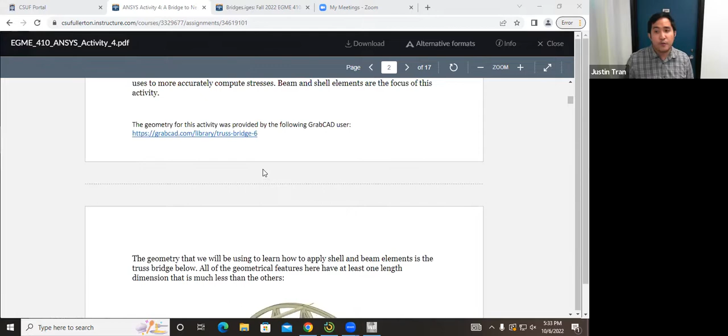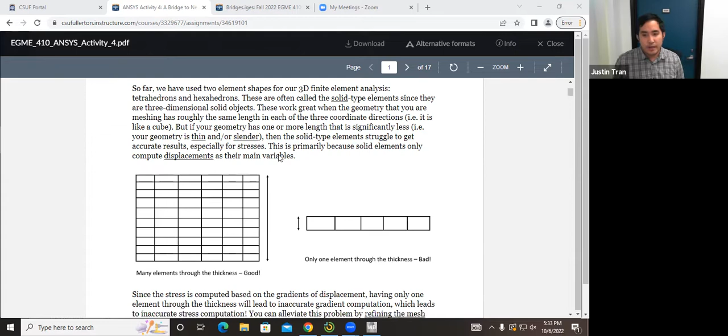So what we're going to do today is start with this geometry. I'm going to show you how to decompose it, take it apart, and replace it with shells and beams. Then the majority of the time we'll spend cleaning up the geometry, making sure it's good in its shell and beam form, and then we'll put it into an FEA simulation.

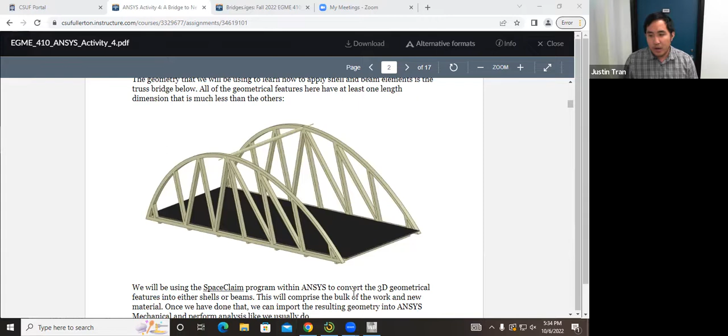Let's go ahead and open up Workbench. Just like we've done before, let's start a static structural analysis — click on static structural and bring it over here.

We're going to import the geometry. Right click on geometry, go to import, and import the bridge geometry that I have on Canvas. If you go to the Canvas site, go to the activity page, there's a CAD file called bridges.iges — that's the one we're going to work with. Go ahead and double click that to load in the geometry.

From there, we're going to edit this geometry in SpaceClaim. This is the first time we've used SpaceClaim — up to this point we've only used Design Modeler in ANSYS, but SpaceClaim actually makes it a lot easier to do shells and beams. So that's what we're going to do.

If you double click on geometry, the default should be SpaceClaim, but if you want to be sure, you can right click it and then click on Edit Geometry in SpaceClaim. It's going to take maybe a minute or two to start.

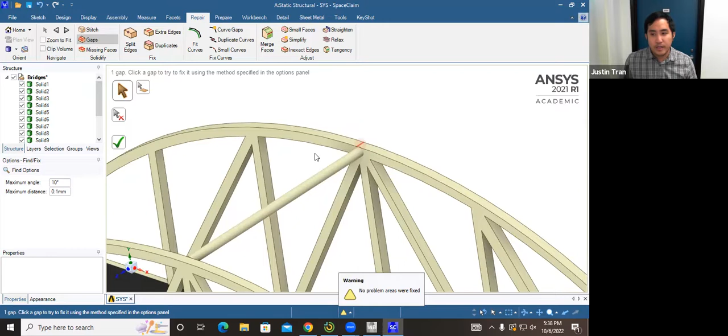And then we're going to do the same thing with gaps. Okay. If you click on gaps, you can see that there's one area here. That right there counts as a gap that SpaceClaim is saying is going to cause an issue. Normally if you click on this, it will fix those areas, but that thing right there is actually something a little bit special that we'll deal with later.

So it's not actually going to fix it, but I did want to show you what it would look like if it did find an issue. For now, don't worry about it. SpaceClaim's not going to actually fix that. I just wanted to show you where you would find it and what it would look like. Okay. Now that we've done a very basic stitching and repair on the solid, we're now ready to start modifying it for our simulation.

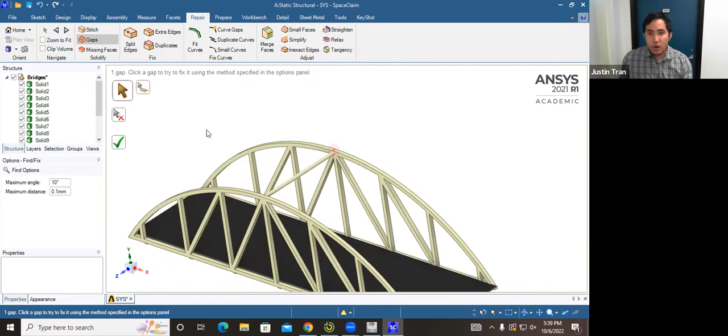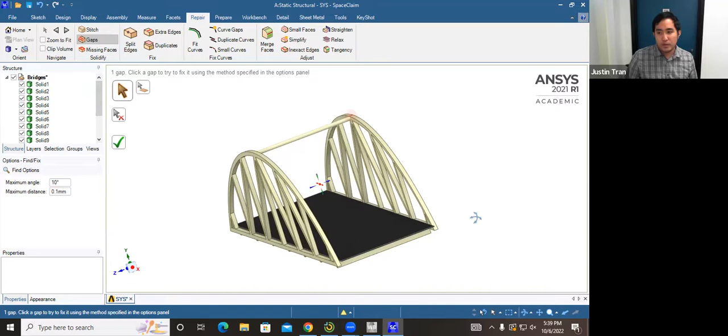Okay. The first thing we're going to do is look at all of the thin surfaces and turn them into shells. Remember, a shell is basically a 2D representation of a 3D surface that's very thin. We actually have three bodies in this assembly that can be suitable for shells. We have the road, and you can see the road itself is very, very thin. If you zoom in on it, you can see it does have some thickness right now. It is actually a rectangular slab, but it's so thin that it's going to be much more suited as a shell.

And actually the sides of the bridge as well. The sides of the bridge are also very thin, because if you look at this dimension, you can see that it's much thinner than the other two dimensions. Okay? So to make a shell element, you're going to click on Prepare. Prepare is on the top ribbon to the right of Repair. And then you're going to click on this operation here called Mid Surface.

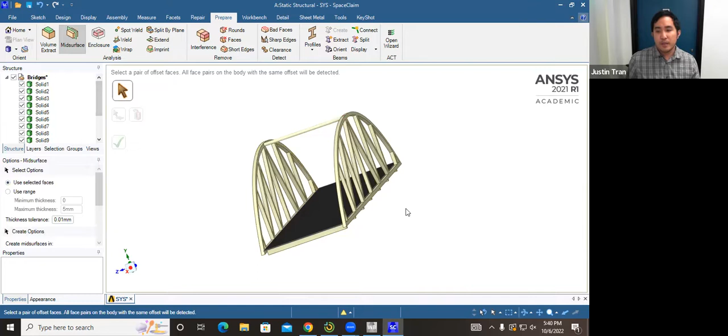If you remember when we talked on Tuesday, a mid surface basically takes two parallel surfaces, eliminates them, and puts a shell right in between. So you're going to click on mid surface, and then click on two parallel surfaces here. Let's start with the road, because that's the simplest one to do.

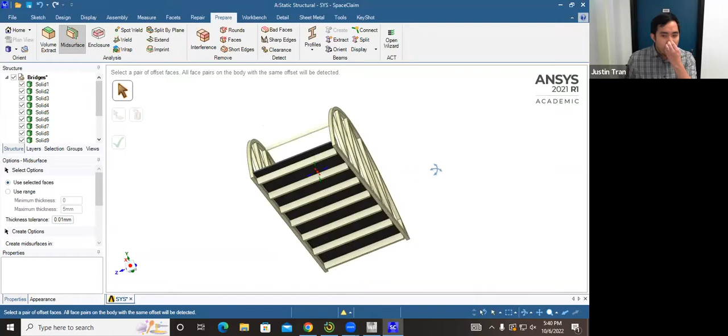Making sure that mid surface is highlighted here, you're going to click the top of the road. That's going to highlight one surface, and then you're going to rotate around. You can use the middle click button to rotate the geometry. And then you're going to click on the bottom surface of the road. Okay.

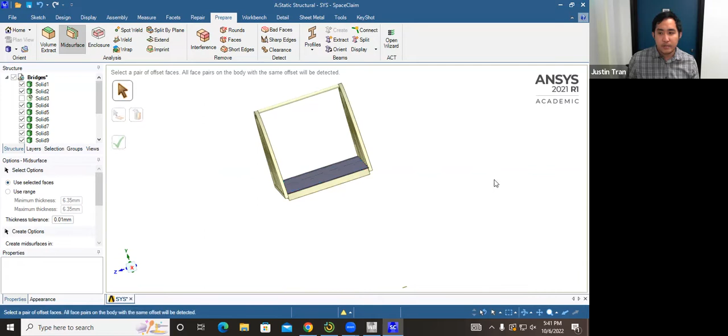And if you did everything correctly, the first surface you click should highlight blue, and the second surface should highlight green. And so to complete the mid surface operation, you're going to click on this green check mark here for complete. Okay. And so after you do that, and you kind of move around a little bit, you click, you'll see that the road has been replaced by a very, very thin sheet. And they even made it translucent for you to kind of see that it's very thin. Okay.

If it's not translucent, then don't worry. This might be a 2021 thing, but as long as you can see that it's very thin, then you were successful. Okay. I think mine does translucent by default, but they might have changed that in a later version.

Yeah. I mean, they update the software every year. It's like buying a new version of a textbook every year. They just kind of move a couple words around, and then they make you pay $120 for it.

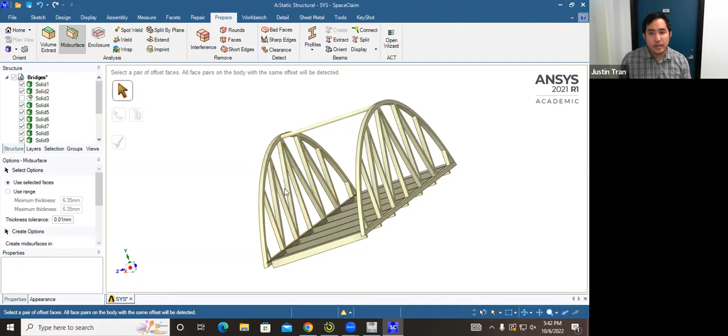All right, was everyone able to create a mid surface for the road? Okay. If it's translucent, that's great. If it's not, then don't worry about it. Okay, and so we're going to repeat the same thing. Mid-surface should still be highlighted, and you're going to do it for the sides of the bridge. So you're going to click on, let's say the inner surface for the bridge, and then you're going to click on the outer surface.

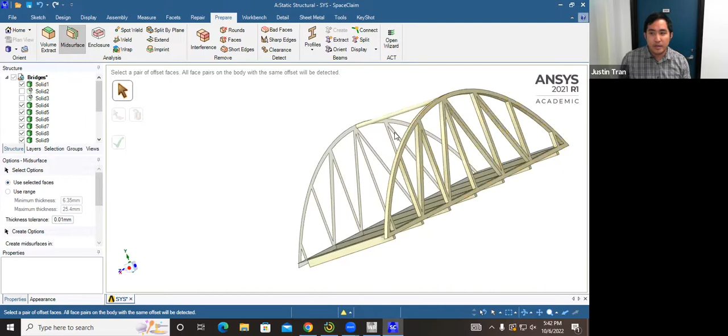Okay, and so you'll see the same thing. It's going to highlight green and blue. You're going to click on the check mark, and then you click elsewhere, and then it's going to replace it with the shell. And then we're going to do the same thing on the other side. It doesn't matter which one you click first, as long as you click both parallel surfaces. And then once you click both parallel surfaces, you're going to click on the green check mark again to finalize it.

Okay. And so once you're done, you should see the road and both the left and the right side of the bridge replaced with shells. So they should be very, very thin at this point. Okay, was everyone able to mid-surface? Yeah. So you're going to go to prepare and then mid-surface right here. Yeah. So it's like a sandwich. Exactly.

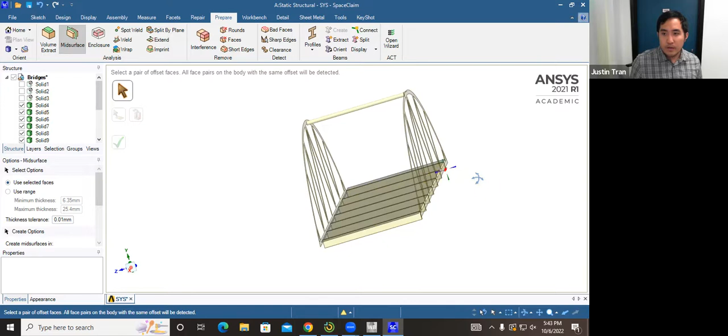Okay. Yeah, so you want to make 3 shells: a shell of the road and a shell of the left and right sides of the bridge. All right, was everyone able to do that? Anyone still need a bit more time? Okay. So I'm going to move a little bit quickly just because there's a lot to go through, but then I'll come back around at different points.

Okay, so the next thing we're going to do is extract out the beams. All the other solids remaining here are slender, so we want to transform them into beams. So you're going to go still in the prepare tab, and then click on this entry right here called extract. If you read the tooltip for this, you can see that it extracts a beam from a solid, and the solid must have a constant cross section. But this part's really easy.

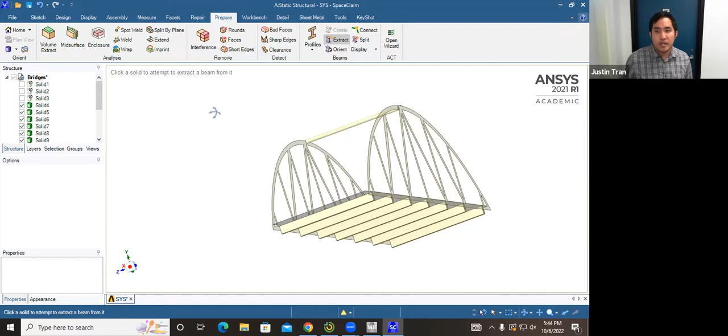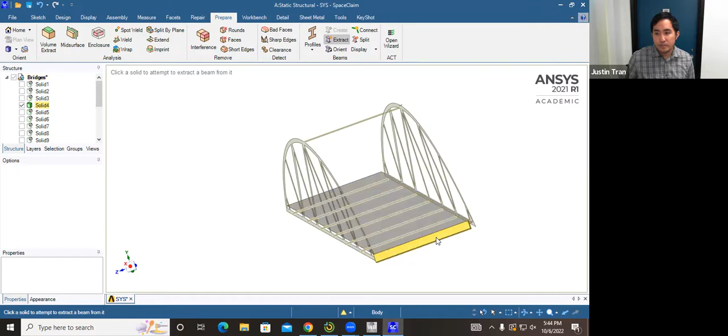So all you have to do is make sure that extract is highlighted, and mouse over to a beam part. It should highlight, and after you highlight it, just click on it. Once you click on it, it's going to replace it with a line, and that line is going to be your beam element. And you're going to do that for all of the beams on the bottom as well. And so in the end, we were actually able to transform every part of this geometry into shells and beams, which is going to be great. Okay.

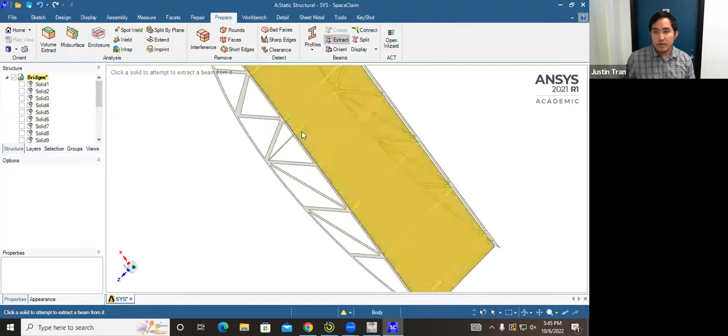Because it's translucent, it's hard to rotate. Yeah, okay, that's fine. All right, and so after you extract all the beams and you've mid-surfaced all the shells, you should be left with something like this. Okay.

And then the fun part begins. And so this is usually when I start to lose people. This next part is a little bit complex. All right, any questions on this so far?

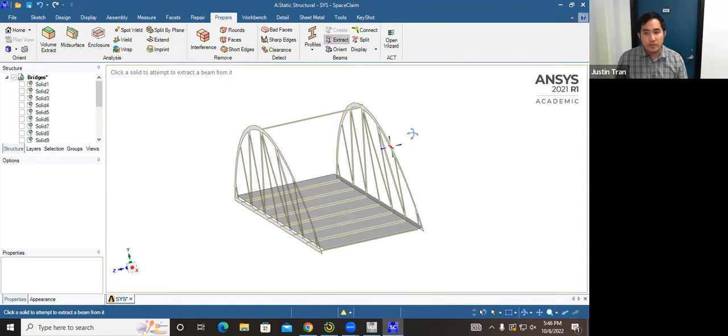Okay, all right, and so now that we've converted everything to shells and beams, you would think that this is good right here, but it's not. And so we are going to have to clean up this geometry. Creating a mid-surface and creating beams is not a perfect process because we do lose some geometric thickness.

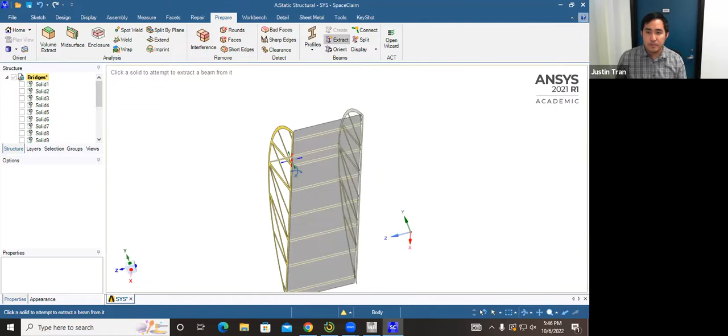And so just to highlight this, let's look at how this beam here connects to the side of the bridge. It's a little bit hard to see, and so I'm basically zooming in here. If you zoom in on this part of the bridge right here, you can see that this beam is no longer connected. In the original geometry, that part was connected because the bridge actually had some thickness. But since we got rid of that, now this beam is not connected. So now we have basically a beam that's floating in space.

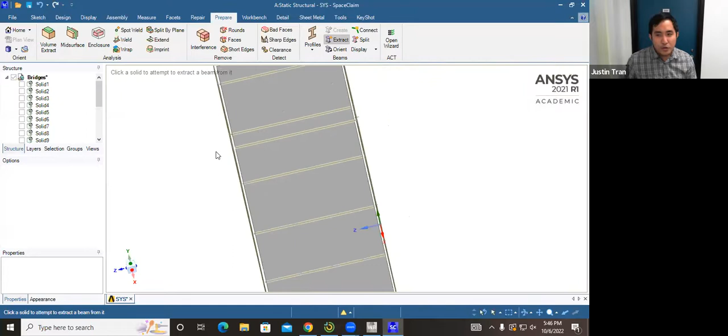And so what we need to do is clean up this geometry so that we can actually use it for FEA, because right now this beam is floating and we won't be able to do anything. Okay, and so the tool that we're going to use is one called extend right here. If you read the tooltip for extend, it's going to extend any surfaces or edges that are not connected to something until they are connected to something. All right, so we're going to click on extend.

And then you're going to see that it says no areas are found. The reason for that is that if you go over to this side of the interface here, you'll see that it's only looking for areas that are within 10 millimeters of each other, which is really small. For this particular geometry, we need to increase this range. We basically need to tell it to look for any surfaces that are up to 50 millimeters apart. So you're going to change that maximum distance to 50 and hit enter.

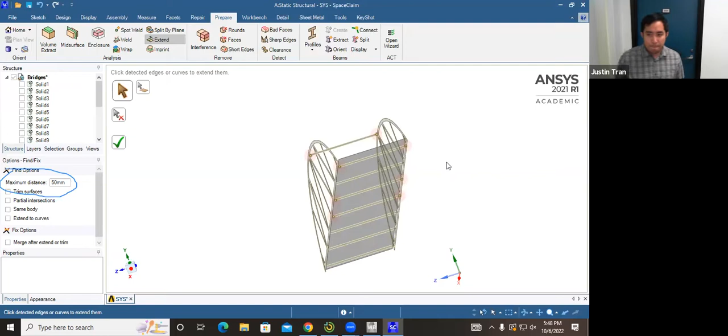After you hit enter, you're going to click on extend again. And then from here, it's going to show you that it found 4 areas. In other words, it found 4 beams that are not connected to anything that can be connected to something if we extend them. If you look at your geometry, it's going to highlight everywhere that it can extend with a red circle. For now, you should see that the top beam can be extended, as well as 3 of the bottom beams.

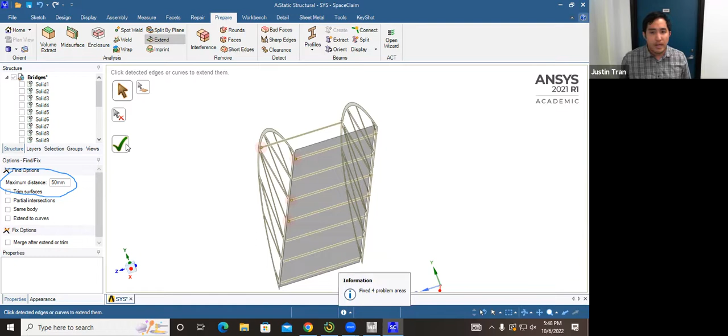All right, so to finalize the extension operation, you're going to click on complete, and you may have to click it more than once. After you click on that and zoom back in on the top part of the bridge, you'll see now that the beam is connected to the bridge as it was before. That's what we want, because when we move this into ANSYS, this is going to come in as an assembly. So we need to make sure that all the parts that should be touching are touching, so that we can form a connection at those points.

All right, any questions on this part here? What about the other beams? Right, so we're going to take care of the other beams in a bit, but there's another issue with the other beams. I chose this geometry on purpose because it is a little bit messy, but that's good, because it's going to give us practice on what we need to do to clean up geometries like this.

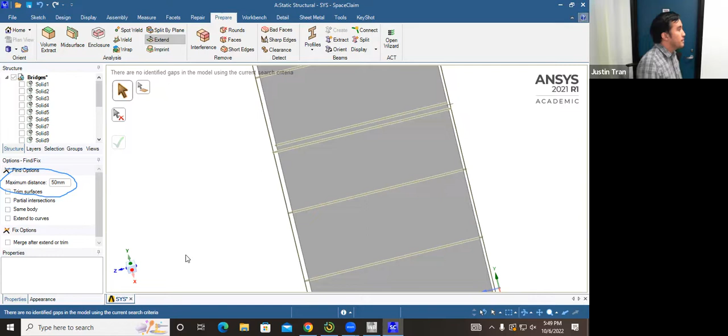All right, question? Yeah. So the question is, is it an issue if there are only 4 to 6 areas where the extend operation was applied? Yes, and that's on purpose. You should still have a few beams here that aren't connected yet, and we're going to fix those next. Yeah.

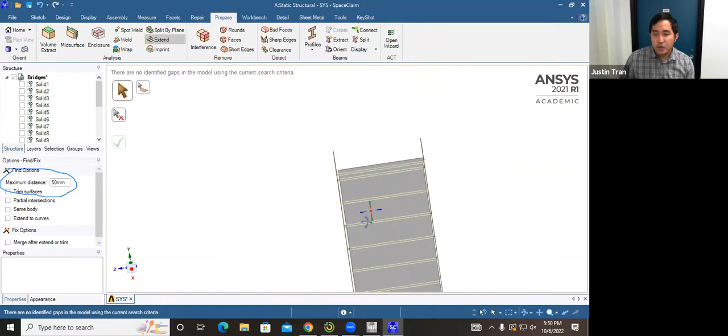Okay. All right. And so, as a few people have noticed already, there are still some beams that aren't connected. Let me show you why. The way the extend operation works is that it basically takes these beams and tries to extend them in their longitudinal direction. So in whatever direction the beam is going, it tries to see if it can just extend it there until it hits something.

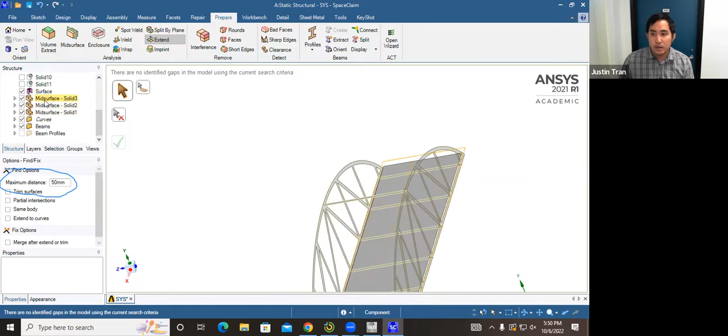But if the beam is positioned in a way where if you simply increase its length it doesn't hit anything, then the extend is going to fail. Let me show you an example here. Let me actually get rid of the road as well, just so you can see. If you want to hide a surface, you can uncheck it here on the left side. And because we're not going to be working with the road just yet, you can go ahead and hide it.

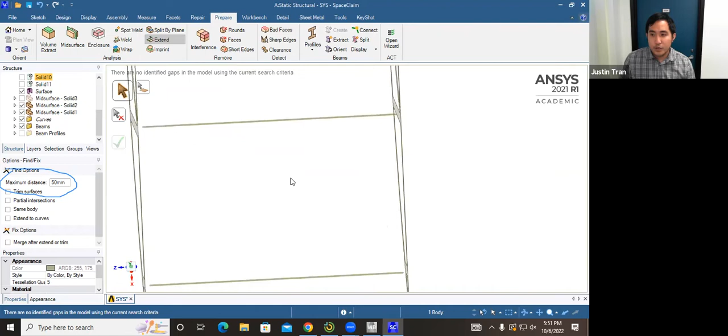So now we just have the bridge and all of the supporting beams. If you highlight over it, you'll see that there are still some beams here that aren't connected, right? This beam right here is one example. For this beam, the extend operation failed. But let me show you why that is. Let's do this.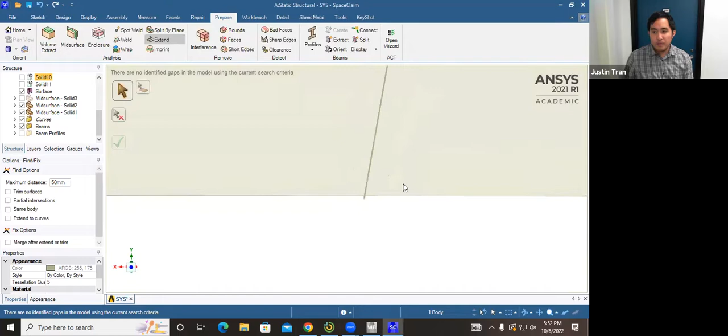So when we try to extend this, SpaceClaim was trying to extend it until it hit something, but it never hit anything. And so it said, okay, we don't need to extend this beam. That's an issue, and we're going to have to fix this. What we're basically going to do is move this beam upwards until it intersects with the bridge. And that's true for these ones as well.

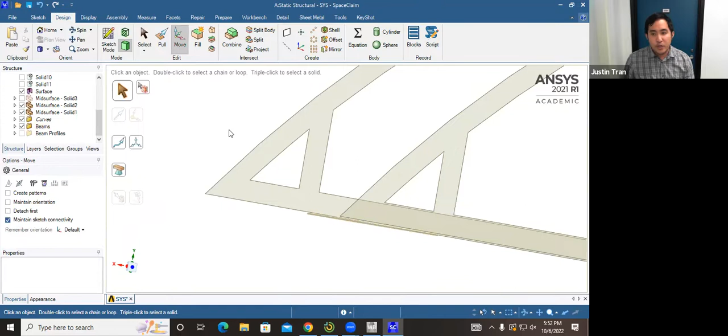To move a part of the geometry, we can do that here in SpaceClaim, because remember this is basically a CAD software. You're going to go to Design, and then to Move. Then you click on the beam and you can move it upwards, but don't do it yet, because we don't know how much we need to move it up. So we first need to measure how much we're going to move it up.

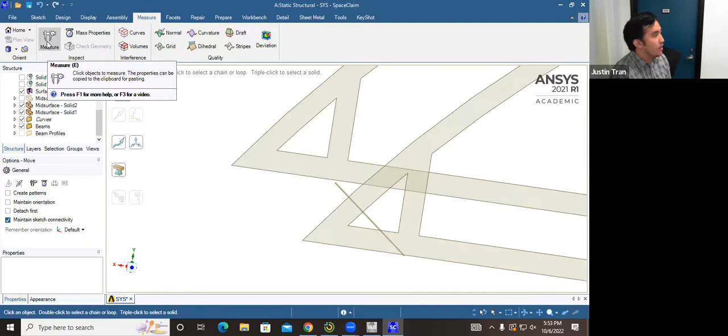Our first stop is going to be on the Measure tab. Come to the top and go to this Measure button right here. Then click on this tool called Measure. It looks like calipers, which is an appropriate symbol for it. One thing you need to do after you click Measure is click on this checkbox for Show XYZ vectors.

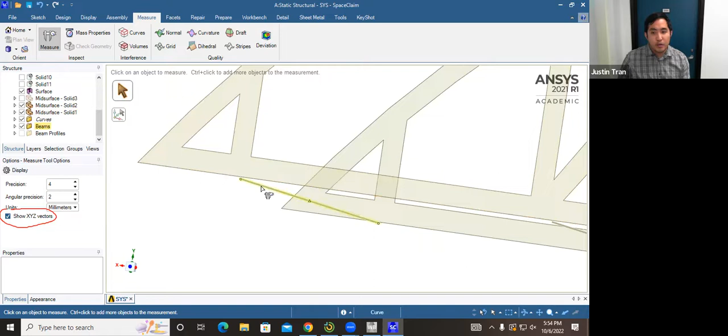Because what we want to do is show basically the Y displacement of this bridge. Now is the tricky part. We want to find out how far below, or in other words, what's the Y distance between this bridge beam and the bridge itself. Hold Control on your keyboard so you can select multiple entries at once. Click on the beam, and then click on the bottom edge of the bridge.

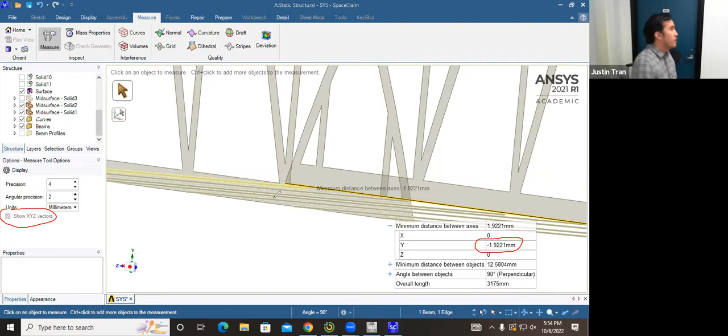So let me highlight it here. If you click on both the bottom of the beam and the bottom of the bridge, you should see the measurement tool come up. For this particular beam, it's about 1.9 millimeters off from where it needs to be. So we're going to move this beam upwards at least 1.93 millimeters.

If you click on a different beam than me, all the beams are off by a different amount, so you might have a different measurement. Just keep in mind what that measurement is, because that's what we're going to move it up by. If you have a piece of paper or a notepad, let me open up a notepad here actually.

Just so you remember it. I have to do this because I'm getting old and forgetful. I'm going to write down the measurement: minus 1.9221 millimeters. Or if you have better memory, you can just remember it.

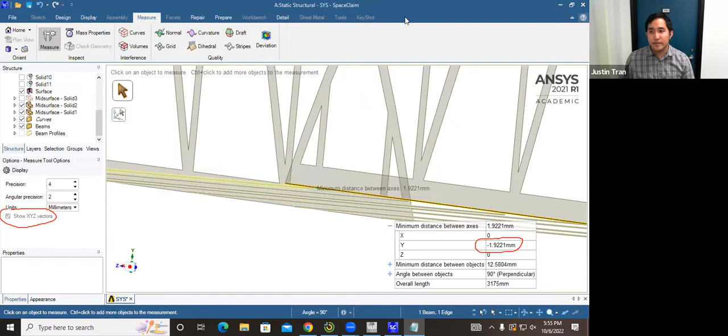After that, you're going to go to the move tab right here and move that beam. Click on move, click on the beam, and then this XYZ thing is going to show up. Click on the arrow in the direction you want to move it. In this case we want to move it upwards, so I'm going to click on this blue arrow.

You can click and drag it as much as you want, but we only want to move it up just enough that it's going to intersect with the bridge. So I'm going to move it up, and in this box entry right here, I'm going to write 1.923. That's going to move the beam into the perfect position where it's now intersecting with the bridge.

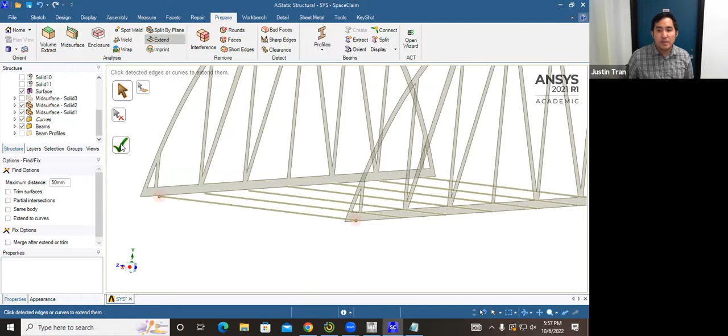I'll do one more step, and then I'll go around and help people because I know this step is a little difficult. Once you move the beam up, to check that it actually worked, go back to the prepare tab and click on extend. If you moved the beam up properly, it should identify 2 extra areas now, and you can extend the beam so those meet the bridge.

I want you to repeat that step for the last 3 remaining beams, so 4 beams in total. Every beam is off by a different amount, so you have to measure each one, move each one individually, and then extend them until they reach the bridge.

I'll give you guys about 10, 15 minutes to do that. I'm going to walk around and help people. If you're having issues, I'll come around, and we'll do the next step once I come back.

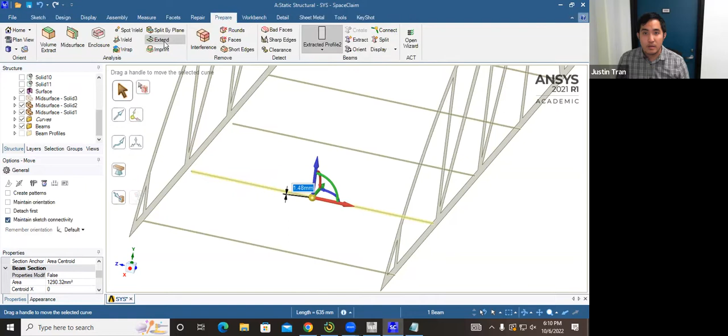It's good. Measure. Click. It's minus 1.9.

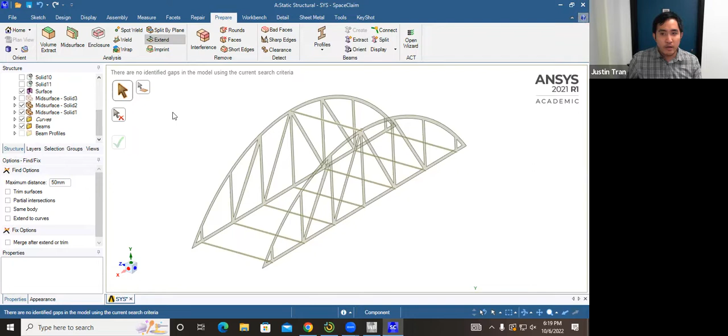And so the last thing we're going to need to do is we're going to need to work on the road. And so if you bring back the road, you're just going to click on the check mark next to solid 3, and that's going to bring the road back. And so we're going to do the same thing for the road.

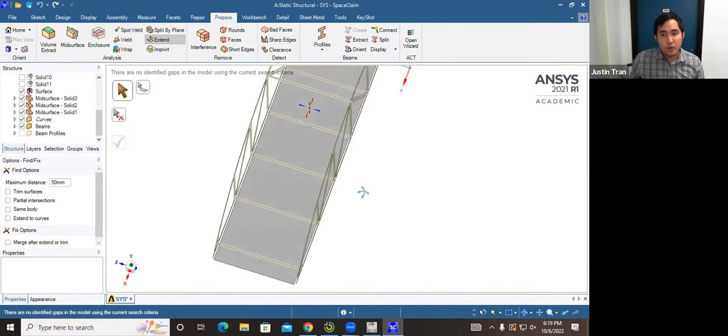And so if you zoom in on the road here, you can kind of see it's not connected to the bridge, and it's actually not connected to the beams either. So we need to move the road downwards until it's connected to those three. And so we're going to do the exact same procedure that we did for the beams, so we're going to click on measure first.

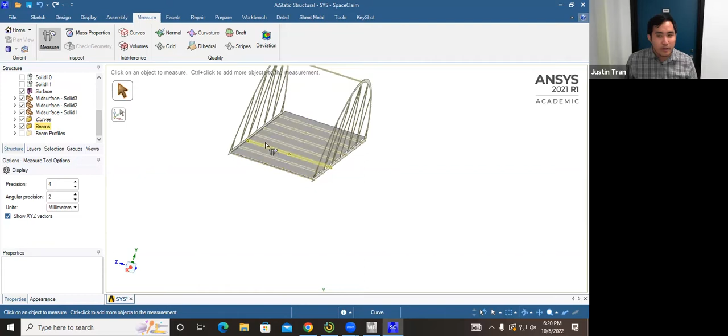Yeah, all the beams are at the same level. I guess they all are now. Never mind, they just have to be close enough. And so yeah, they have to be extended and just close enough. And so you're right, if you measure each of them exactly, they're probably offset by a little bit, but that's okay, they're all connected and they're all close enough.

Okay, so we're going to click on measure here, we're going to click on the road, and we're going to click on the bottom edge of the bridge, because we want to move it downwards. And you can see here that the amount that we need to move it down is around 28.3735.

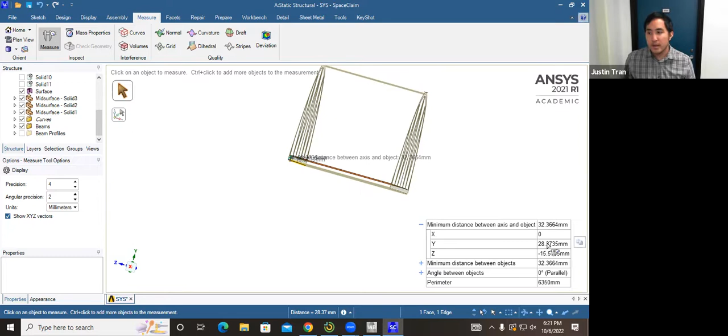But here you have to be a little bit careful. I know what I've been telling some of you is that for the beams, we kind of overshot it a little bit to try to make sure that it intersects. Here we want to make sure we don't overshoot it, because if we move the road down too much, it's not actually going to intersect with the bridge. So we're actually going to stop this one just a little bit short, and I'm going to move this one down 28.37. Okay.

So when you're moving pieces of your geometry around, with shells and beams, you have to think about how much you need to move it down. Should you overshoot it or undershoot it? In this case, we want to undershoot it because we don't want to move past the bottom of the bridge.

For this one, you can copy my value because there's only one road. The amount I'm going to move it down is around 28.37.

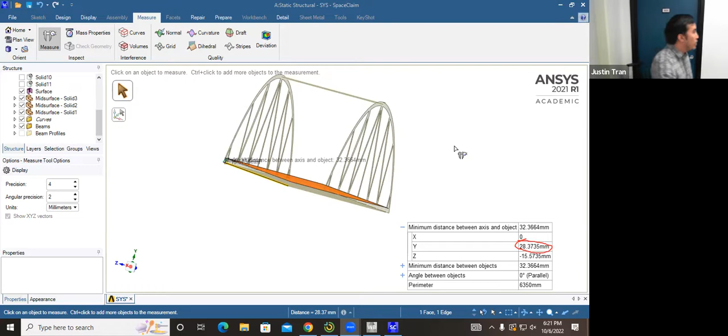I think what I was seeing too is that when people were moving the beams around, you might have moved the bridge up a little bit and then moved it down. But that's okay, there's going to be some variation based on that. The most important thing is that everything is connected and attached.

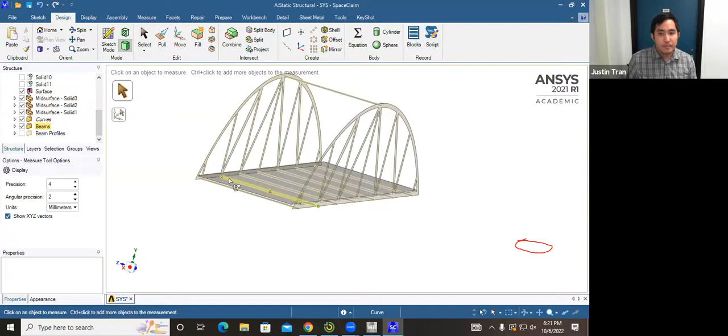I'm going to click on design, go to move, and click on the road. Once you click on the road, you click on the blue arrow again and move it down. I'm going to move it down 28.37.

Or however much you need to move it down to intersect. You can see after I did that, the road is now sitting right on top of the beams. So if we do just one more extend operation...

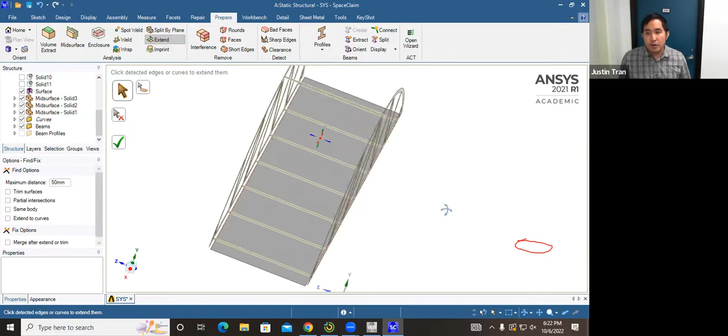If you click on extend after you move the road down, you'll see that there are two more areas that you found. Those two areas are the left and right sides of the road. You're going to click on the green check mark.

After you fix that area, your bridge should look like this. So we changed this geometry, replaced it with shells and beams, and then cleaned up the geometry to make sure everything is connecting the way it needed to.

The issue you run into when you use shells and beams is that you actually do get rid of parts of the geometry. So most of the time, you're going to have to use things like this to clean it up, to make sure everything is connected the way it's supposed to.

All right, any questions on this?

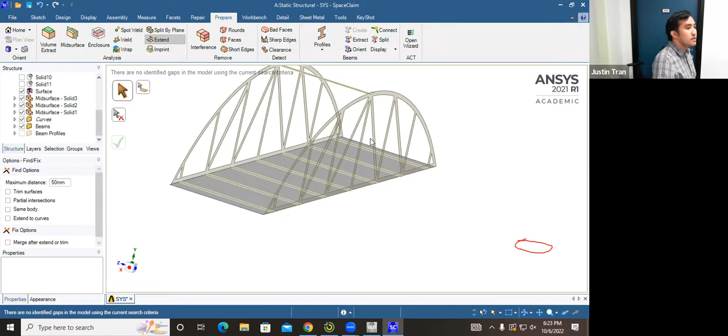All right, so that's it for SpaceClaim. I'm going to go ahead and exit out of this for now. If you're still working on the extensions and the moving and stuff, don't worry about it, I'll come around again later.

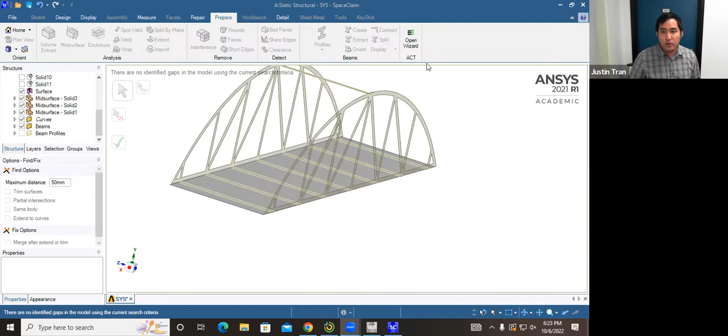But now we're going to move over to mechanical. If you were able to extend the road, you are good to go. So you can close SpaceClaim, and then you're going to double click on model here to open up ANSYS Mechanical.

It auto saves, right? Yeah, it auto saves. I mean, the geometry auto saves, but then if you close Workbench, that does not save.

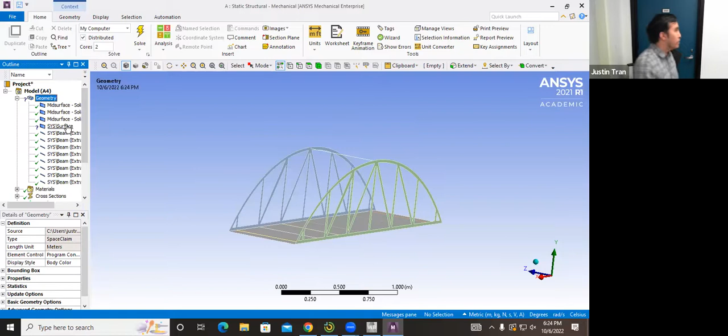Okay, so once you're in mechanical, you should see your geometry again. First thing we're going to do, we actually still need to do quite a lot before we run the simulation. But the first thing is we're going to get rid of this extra surface right here, this kind of little chopstick that's sitting by itself up here.

If you go to your geometry list in mechanical, you should see that there's one surface called sys/surface. We're just going to go ahead and suppress that. So we're going to right click on that, and then we're going to suppress the body. What that's going to do is just get rid of it from the model.

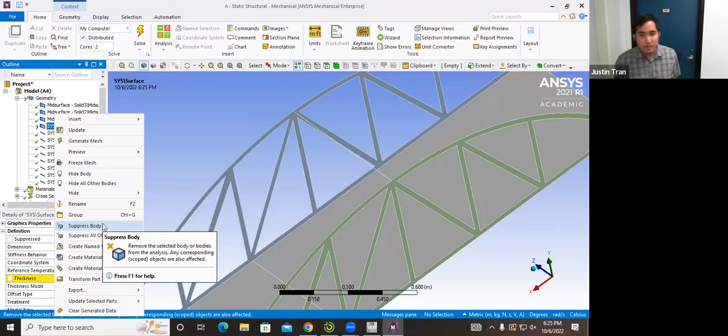I actually don't know what that is. It's just kind of an artifact of the CAD model, but it's not something that we need for the simulation.

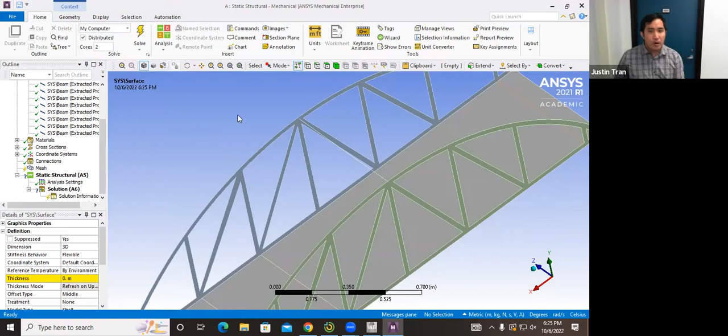Okay, so the next place we're going to go is connections. If you remember from our flagpole or signpost activity, whenever you have an assembly of parts in ANSYS, you need to define how those parts are going to interact, because once the simulation begins, those parts are either going to stick together or not, depending on how you define it.

We have quite a complex assembly here. Each individual shell that we made and each individual beam is actually a separate part. You can click and highlight all of these, and we need to define how all these parts are going to interact. We're going to do that through connections.

What you'll notice at first is that the connections are empty. When you make shells and beams, by default the connections are not going to be populated, and that's different from activity 3, because remember ANSYS kind of populated that for us there. So we need to make these manually.

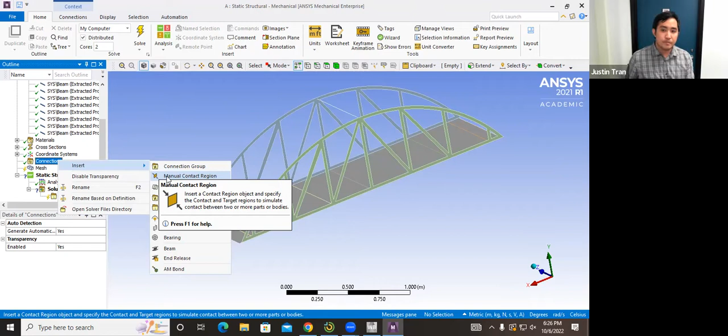So you're going to right click on connections, insert, and then click on manual contact region. What that's going to do is allow you to define different parts of your model that have to be physically connected.

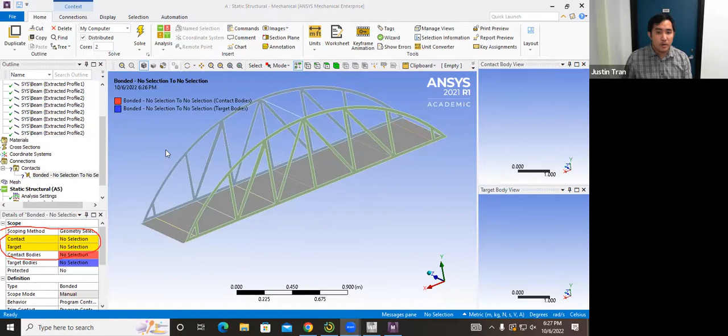After you click on manual contact region, a new area is going to show up, and it's asking you to define the two parts of the geometry that are supposed to be connected. Let's do something simple first — let's connect the side of the road to the bridge.

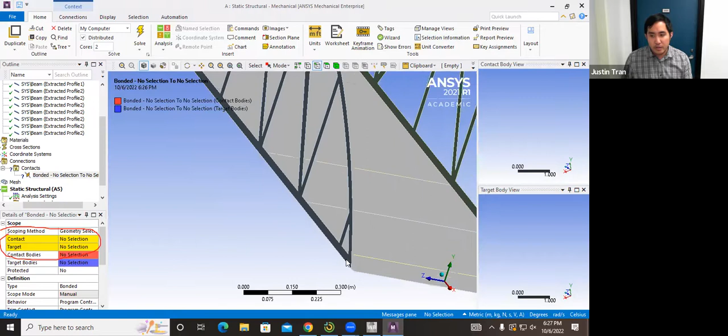First, make sure you click on edge selecting mode, because we want to click on one edge of the road. It's a little hard to do, but if you look on one side of the bridge, the road is kind of hanging over. We're going to zoom in on that edge and click on it, and that edge should highlight green, just like that.

Once you've selected that edge, we need to assign it to one of these entries — there's one entry called contact and another called target. For this edge of the road, we're going to assign it to the contact region. After you select that edge, click on contact, and then click on apply.

Then what that's going to be connected to is the side of the bridge. The side of the bridge is a surface, so you're going to switch to face selecting mode up here, and after you switch, you're going to click on the side of the bridge. Make sure that surface is highlighted, and then select that as the target.

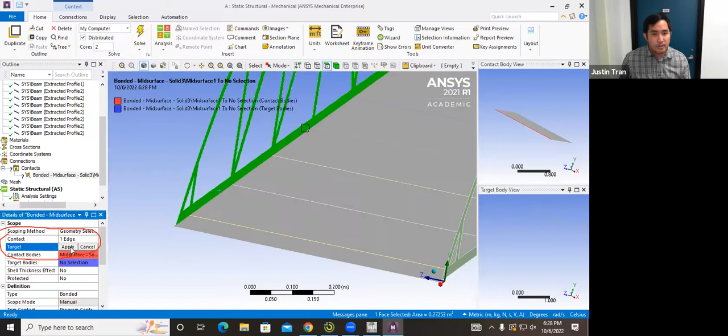After you see that, you can see we've created a new connection here — it's a connection between this side of the bridge and the road, and that's now a bonded connection.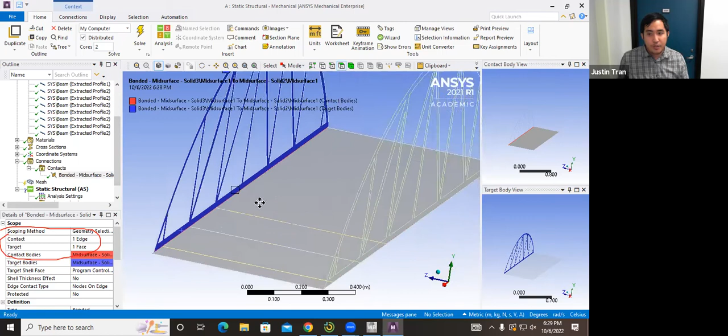We're basically going to be doing this for all the different connections that we need, but I'll go through that with you guys in a bit. Are there any questions on this connection here?

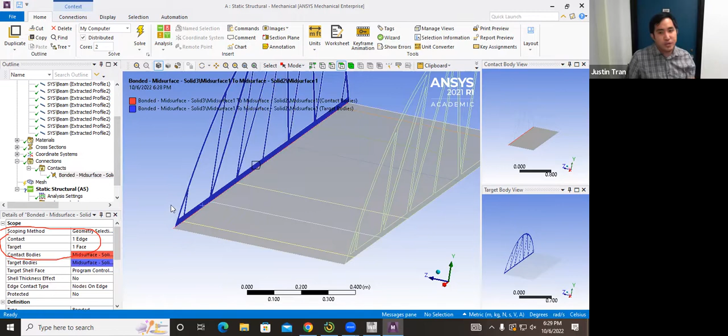The next thing we're going to connect is the ends of the beams to the bridge. There are 8 beams in total. We're going to right click on contact, click on manual contact region, and we're going to connect the ends of these beams to the bridge.

First we need to select all the ends of the beams, clicking on point selecting mode or vertex selecting. You might have to zoom in for this — click on each end of the beam right here, and make sure you select all of them. You're going to have to hold Control and zoom in to different parts of the surface. So that's one, that's another one.

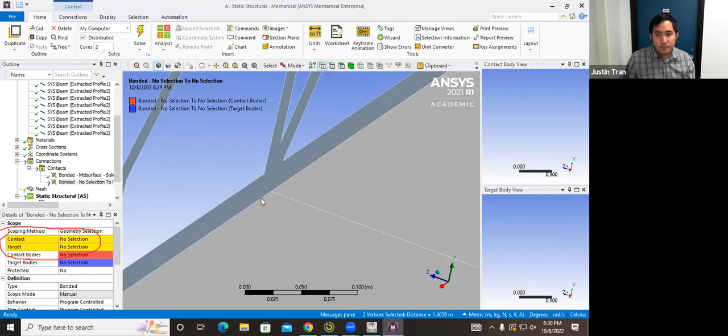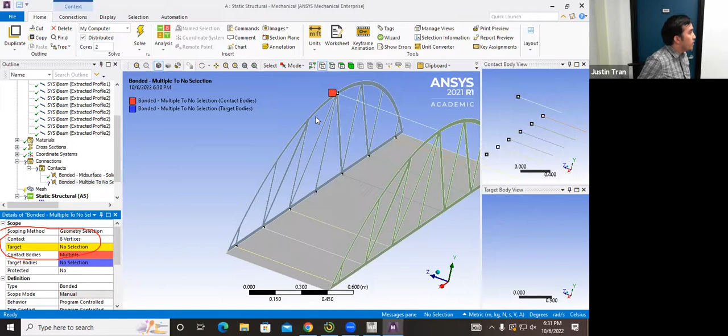There's one right there. There's one right there. And there's one right there. Okay. And so you can kind of group select all the points for the beams on one side. And so there should be 8 of them in total. And once again, we're going to choose these as the contact. So after you select the 8 points that are on the edges of the beam, we're going to assign that to be the contact.

And then the target here, we're going to select to be the side of the bridge. So we're going to switch back to face selecting mode. We're going to click on the side of the bridge and click apply for the target. Only one side at a time. Yeah, one side at a time. And then you're going to repeat that for the other side. So let me kind of rename these. One to be contact.

Does it matter if we do the inside face or the outside face? Wait a second. No, it's a shell, so it's the same. DJ, what was your question? How many points do we need on the bottom? There's 7 on the bottom and 1 up top.

Okay. And so I know this is another part that's going to take a bit of time. I'm going to go around again, but let me list out all the contact regions that you need. So you need: 1, left side of road to bridge. 2, left sides of beams, 8 of them, to bridge. You're going to need the same thing on the right, so 3, right side of road to bridge. 4, right sides of beams, 8 of them, to the bridge.

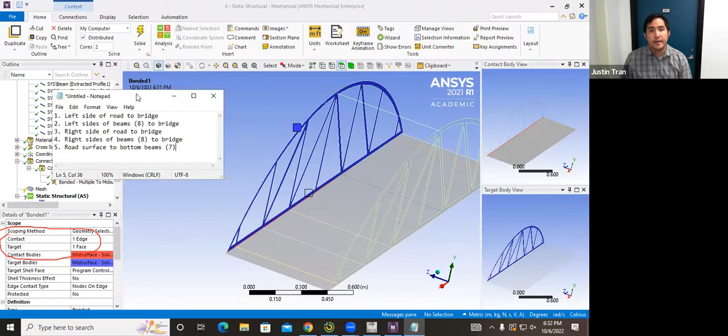And then 5 is going to be the road surface to bottom beams, and there are 7. So you should have 5 contact regions that you're going to define, and these are the list of those. I'm going to go around and help people. I'm going to prioritize the ones that are still in SpaceClaim, and if you're on the contact parts, try to work with the people around you. But I want to make sure everyone gets past the SpaceClaim part.

One side of the road is lower than the other. That's what I figured, right? I tried to account for that, but still. Looks like it's the left side of the road. Once you measure, that's it. We want to move it. Click on compare. Click on the green check.

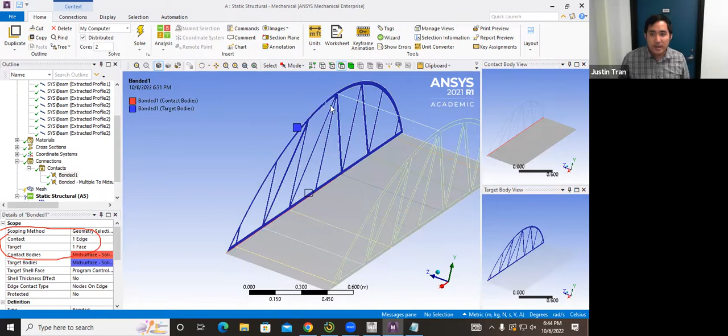So if you made a connection and there's still a question mark here, try swapping them. If you are getting a question mark here, you can right click and click on flip target and contact, and that's going to swap them for you. You want to swap it so that the target is the bigger one between the two.

Okay, and this always happens every year. I didn't really get to the end of this activity, and so all the instructions are there in the PDF, and you can try to finish it from there. Of course, this video will be uploaded online, but the most important thing to get through today is if you can get through the connections, then that's all of the new stuff.

After that, it's just a regular mesh. You're going to apply boundary conditions on it. So all of that's the same as before. But if you were able to get through all the contacts today, then you're in really good shape. Okay. If you're still working on it, that's fine. I'll stick around as long as I can until Professor Gary comes and picks me up. But you're always welcome to come to office hours too.